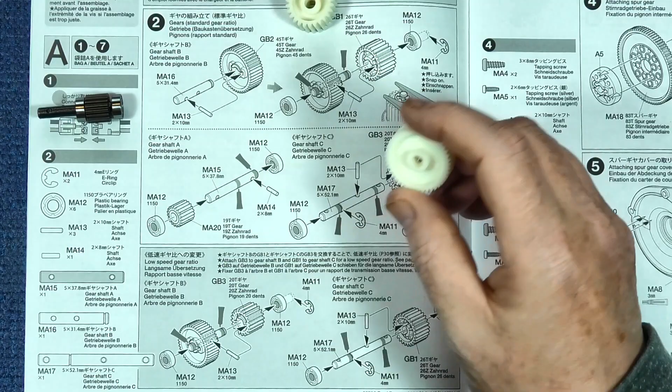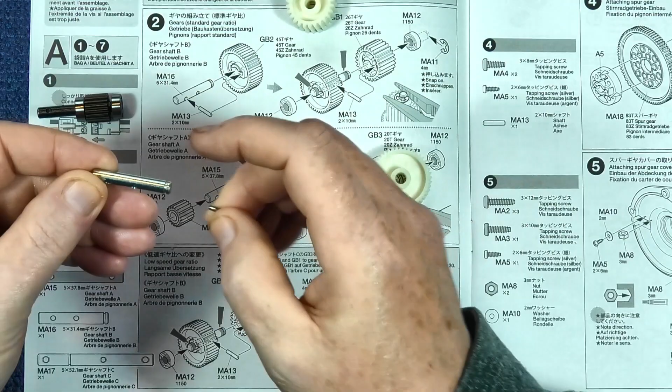First off, we get this part here, which is GB2, and it's 45 tooth, and then we need one of these steel pins. Checking the orientation of MA16 bar, we pop the rod through.

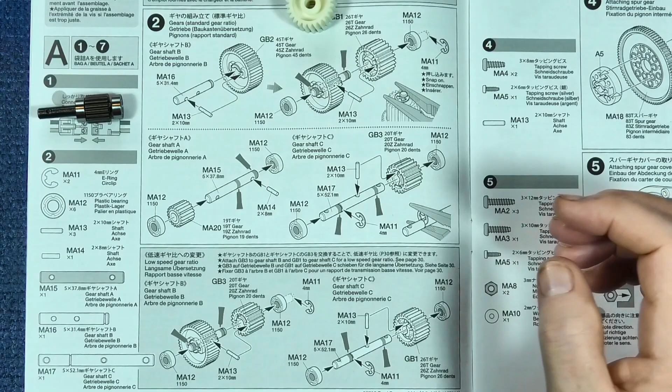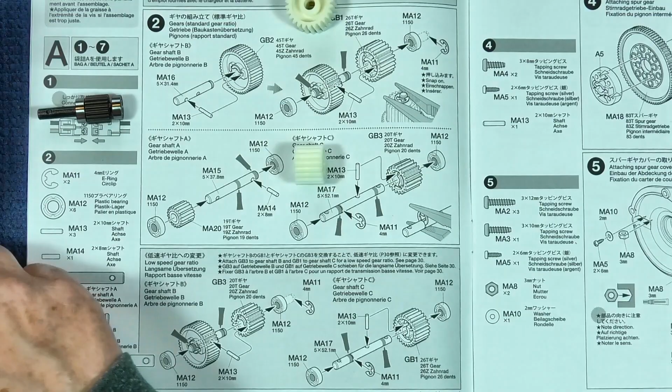And this is the tricky bit. We get the gear and pop it on, and as I say, because I'm going for the low speed, I'm going to take this part here, GB3, which is 20 tooth, and we're going to pop that one on instead of GB1, which is 26 tooth. So we pop that in there, and we pop that over as well, it says.

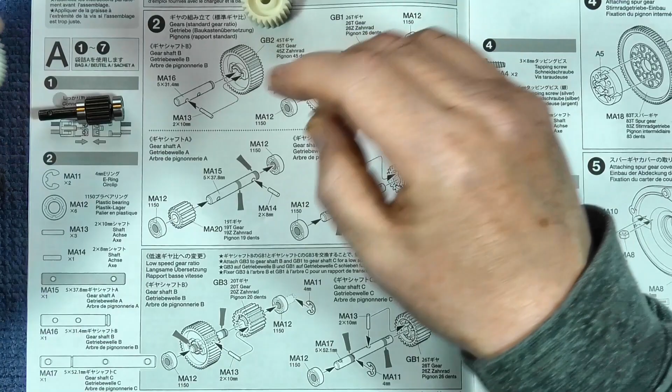And then, oops, we need an 1150 bearing, and in this case RC Junkies also supplied me with metal bearings, so I've chucked the plastic bushings away because I think I've got millions of them. And then we pop a circlip on. Almost. There we go. And that's your first gear sorted.

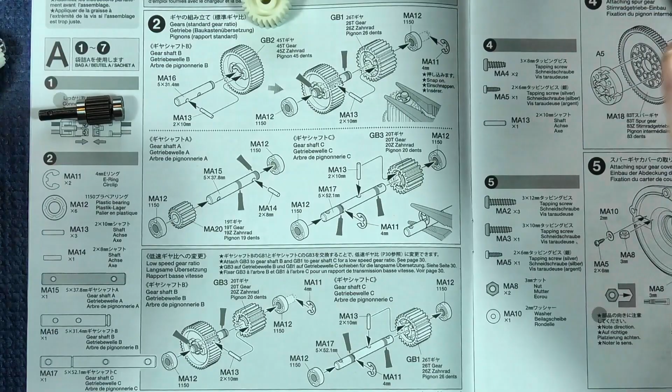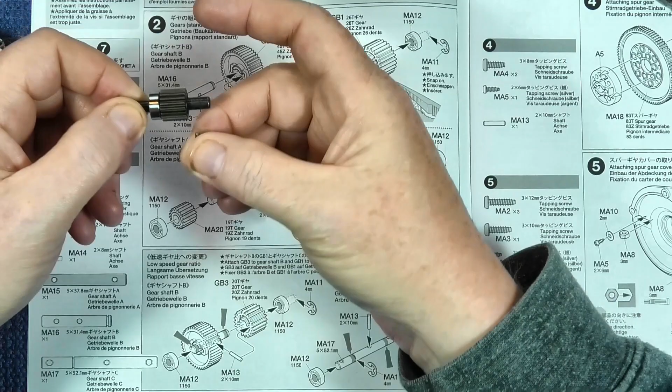I've done this, I think this is the A gear. I'll have to check. Yep, with that lovely metal gear, which is, I think, is it 19 tooth, do they say, or don't they say what tooth is? Oh no, it's another 19 tooth one. So I've done that one.

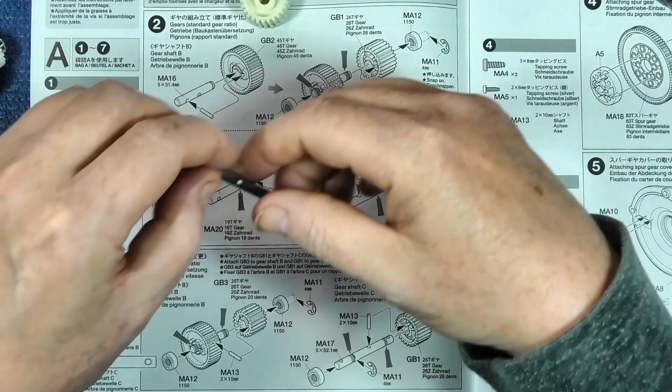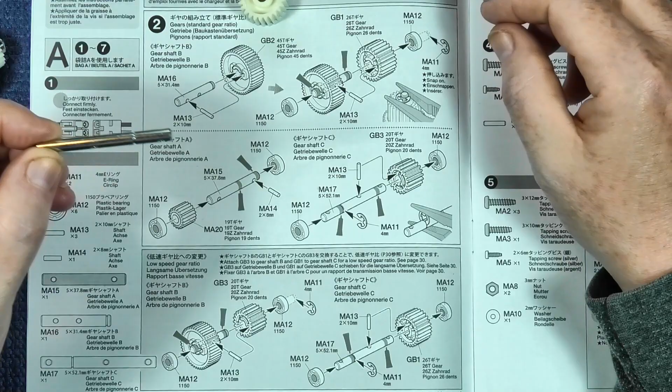I didn't realise it would fall apart when I picked it up, so we can leave that one, and we can then move on to which one is it, Gear shaft C. So we've got another circlip there, so I think we can put that on. Yeah, I can't see why we can't put that on now.

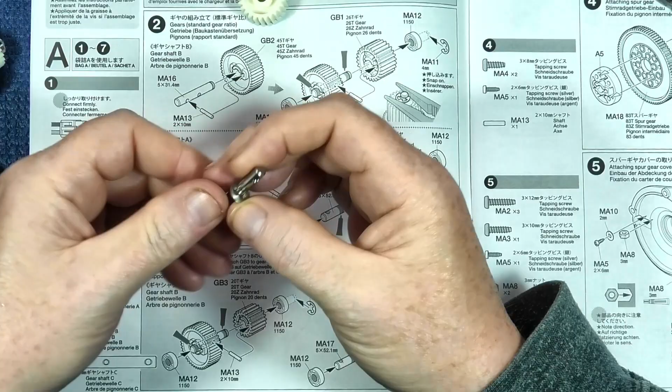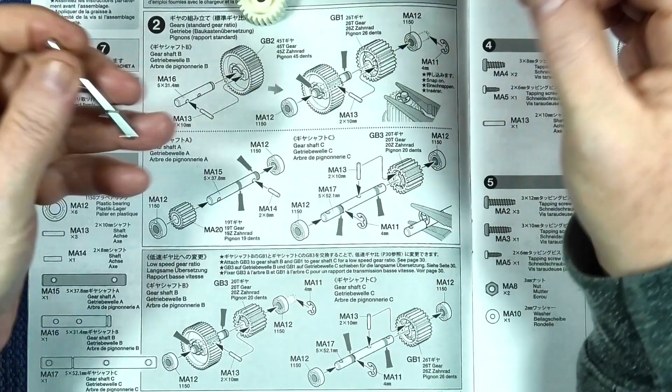Whoops. Hooray! Yep, so that's on. So then we need to orientate it, and we need another pin. And the gear, and then another 2 bearings, one on either side.

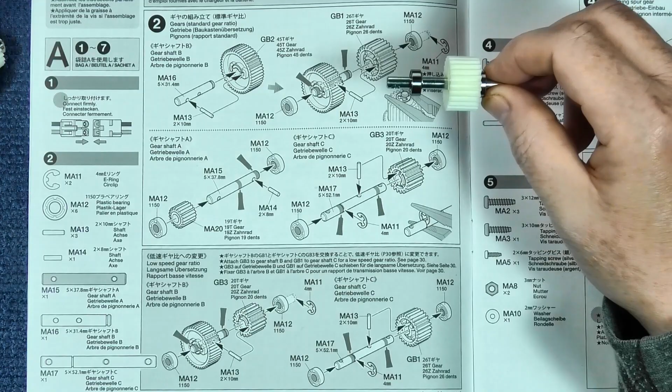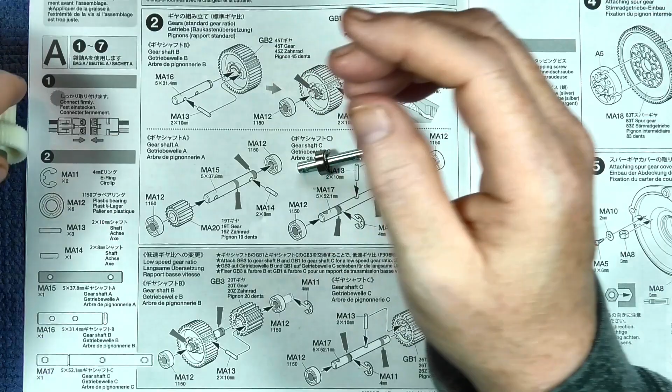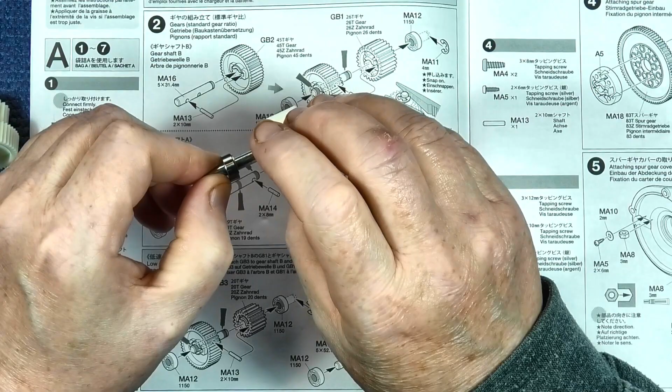And yeah, it falls apart again, and I forgot the bearing on this end for that gear, so there we go. That was all the gears made up till this one fell apart. I'll get the bits ready for step 3 and we can carry on.

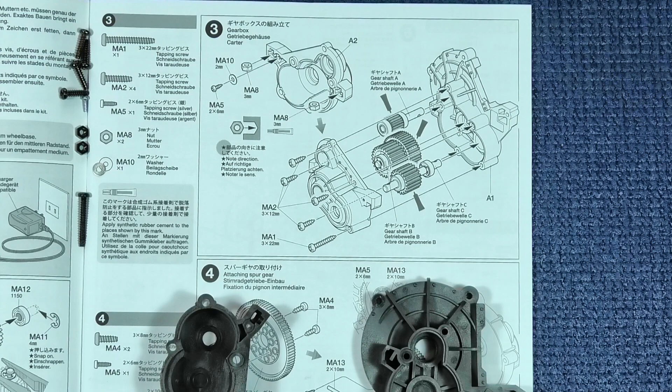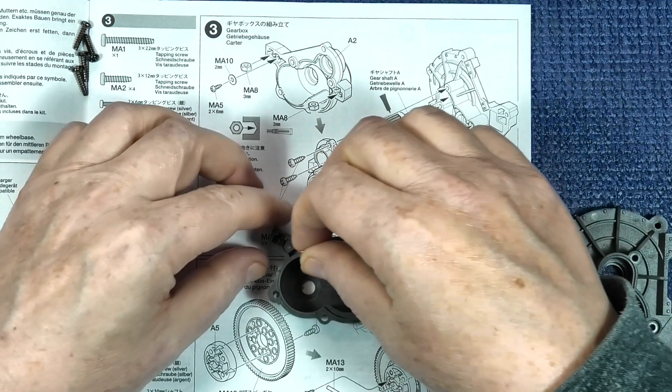Right, step 3 is installing the gears into the gearbox. So without further ado, we will get on with A2. And A2, we need to do a few bits, which is installing these 3mm nuts, and they're going like so, but this one needs to be held in place.

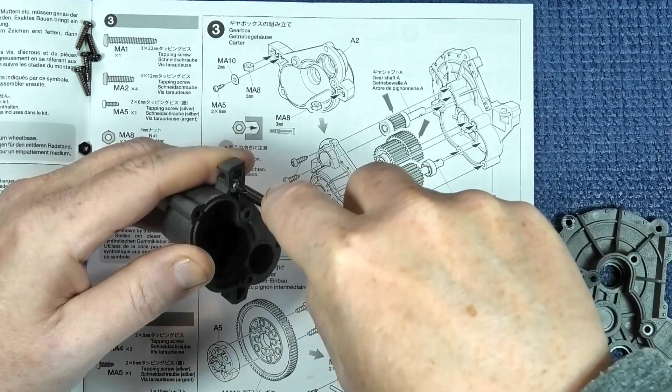By a 2x6mm screw and washer, which then goes in there. If I can get it in, and just, yep, that'll do. And then we can take a screwdriver. Doesn't look like it's going to hold it in place, but I shall see in a second. There we go, we'll tighten that up. So, well, yeah, it's a loose fit. The other one, however, just slots in there like that. So bear that in mind when we come to join them up.

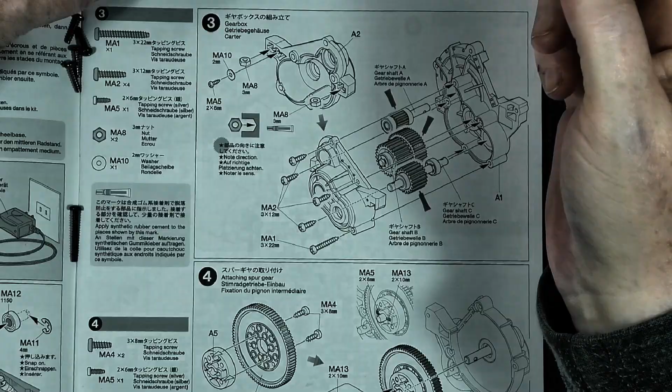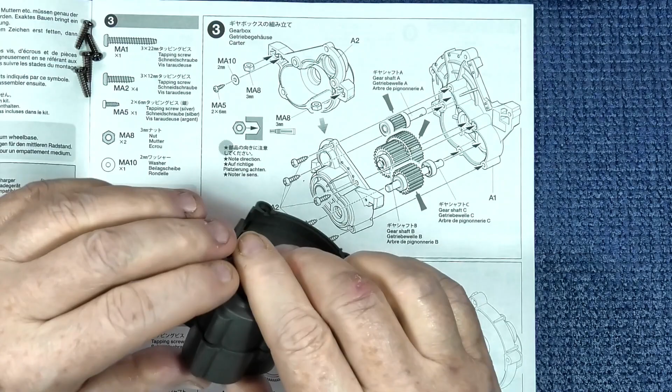Now, there's a note here that says apply synthetic rubber cement to the places shown on this mark. I wonder why that is. I would have thought that would have been held in place. Let me just check. Yeah. So, do you know what? I ain't got a clue what synthetic rubber cement is, so I'm not going to bother. We'll leave it loose and see how we get on.

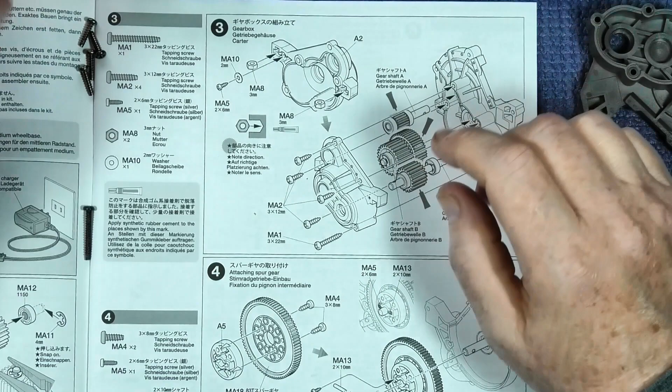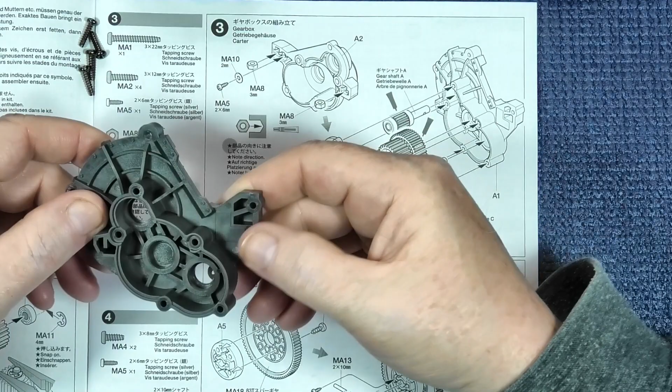Right, so the main bit, we take part A1, and this is like some sort of plastic alloy amalgamation. I'm not sure, I can't remember. It doesn't quite look like FRP, but it might just be the colour plastic they use to mix in with the fibres. But anyway,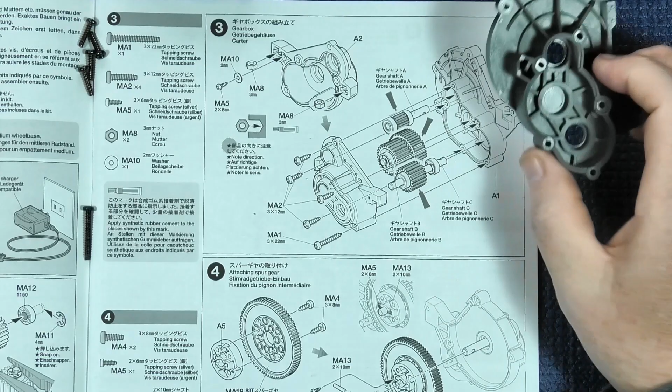We are going to need to do some greasing, I believe, and I think we start off by pushing that through there and then locating the bearing. And for applying grease, we've only got the one tub, but it's ceramic grease, so I'm going to use that. And what I tend to do is put a blob on, and then spread it round with a paintbrush like that.

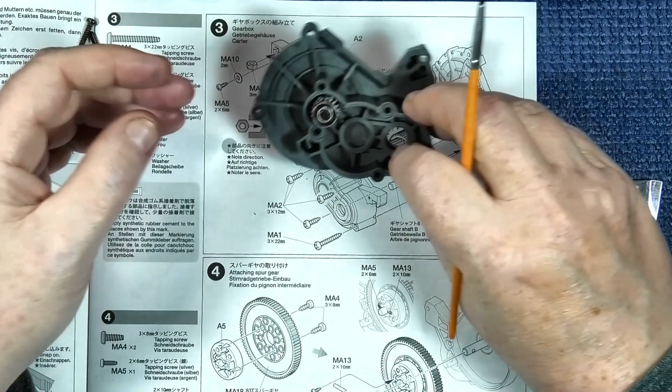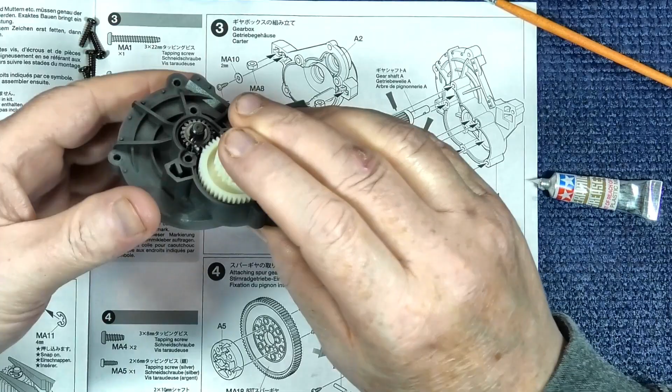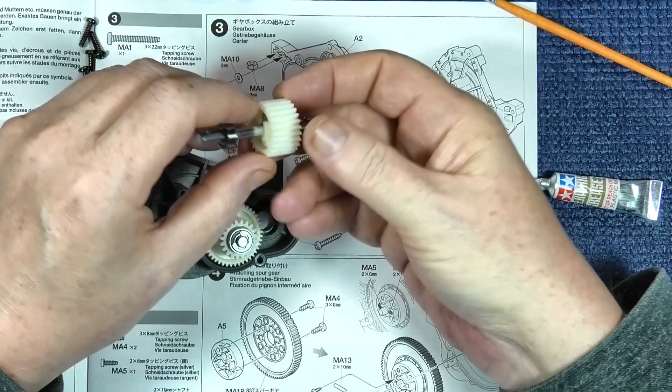And then, looking at the diagram, we've got this one that pops in there, and then finally this one, once I've put it back together, it looks like that's how it all goes together.

I'll get on and grease it all up, and then this just goes on like so, and that's why they want you to glue that in, because it fell out. But hey, I'll sort that out and show you the outcome shortly.

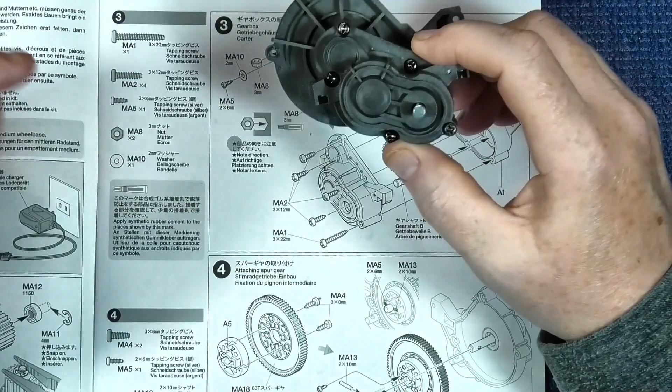Right, so here it is. It's held in with 4 12mm screws and 1 22mm self-tapper.

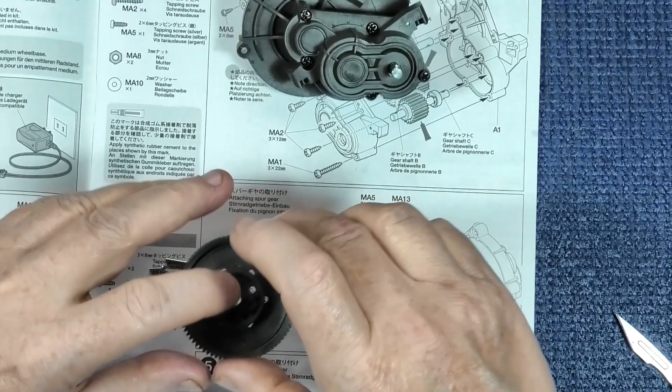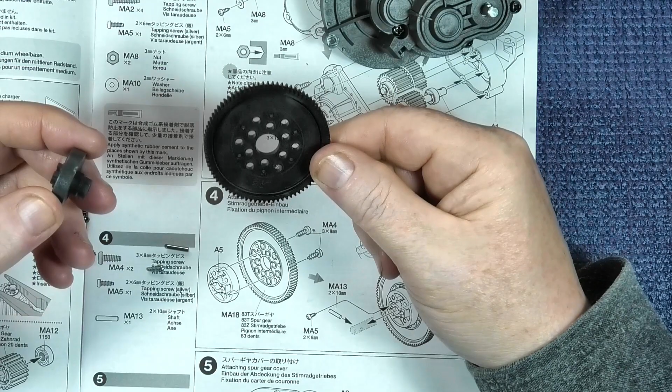Okay, so step 4 is making up the spur gear and then putting it into this gearbox here. So we've got parts A5 and the 83 tooth spur gear. Now that's a big spur gear if you ask me. I don't think I've ever seen one that big before.

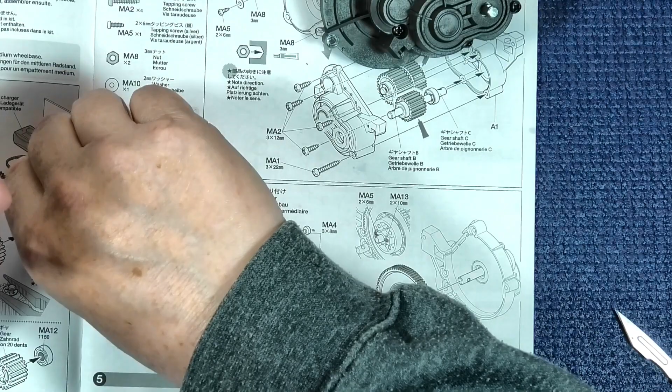And we pop A5 through, and then that's held together with just 2 screws, and it doesn't seem to matter where you screw them in as long as you do. That's like that. We then pass the spur gear through.

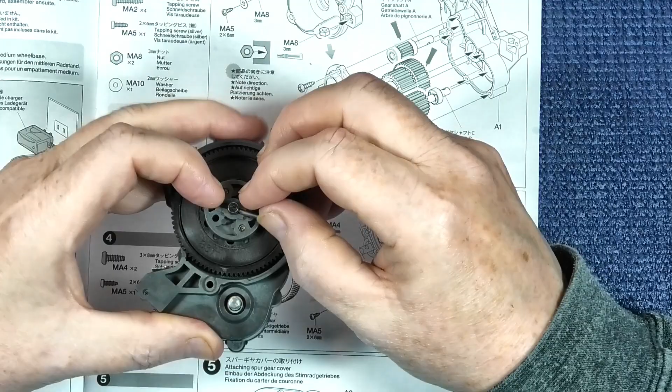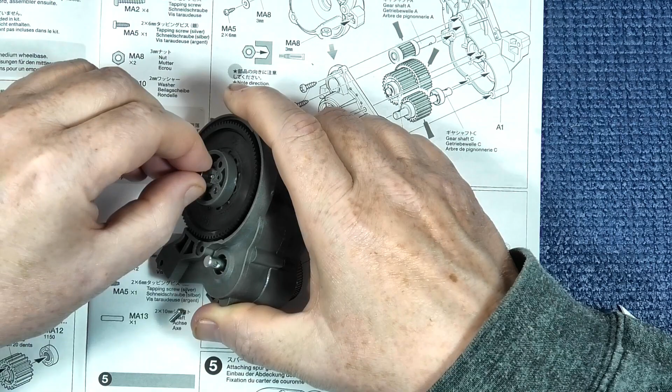And then we've got to try to line up the hole to put the 10mm bar through. Come on, you could do it. There we go. Surely, okay. Right. Okay, so what I've had to do is grab the shaft and pull it out so that the holes actually line up enough, and then we've got this screw here that goes in there.

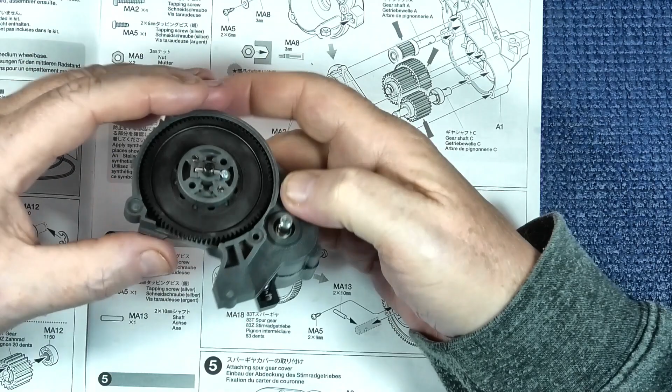Which once tightened will hold that pin in loosely. So I'll go round and grease that up, and we can carry on.

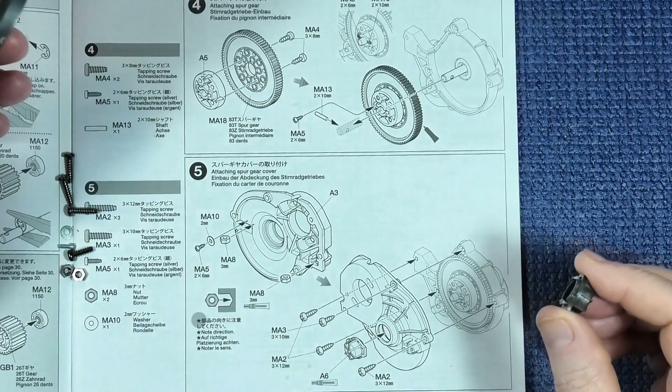Step 5 is installing the spur gear cover, which is part A3, but we also need this little part here, which is A6. That seems to tell you to glue this in, but there are clips for you to be able to take it out.

So I'm just going to try grease and see how I get on. And I think it should just push in, and yeah, it looks like it's going to hold in place. It's a bit loose, but hopefully that bit of grease that I put on will keep any dust out. Right, so coming back then, we've got

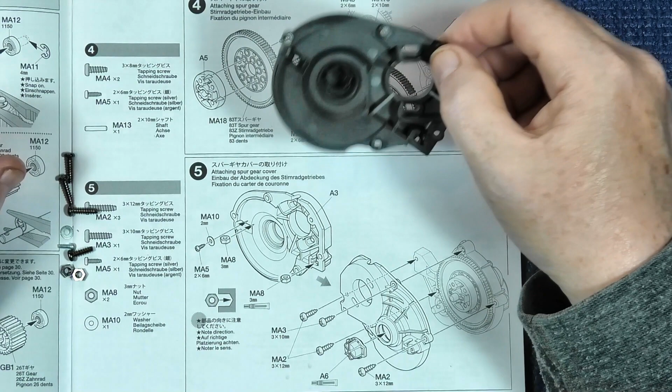Orientation this way round. Yes. Right, now this is going to be tricky for my podgy fingers. We've got to install one of these nuts in there. There we go, I think it's in.

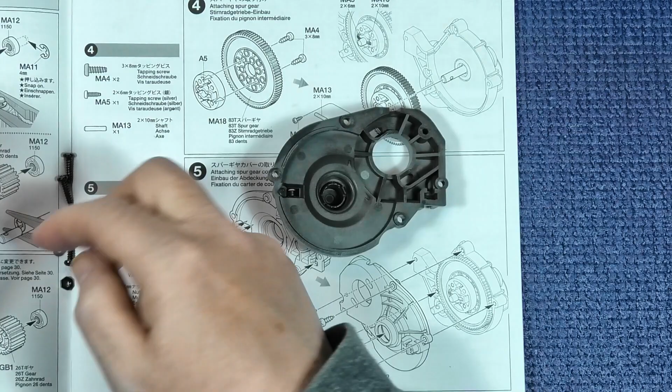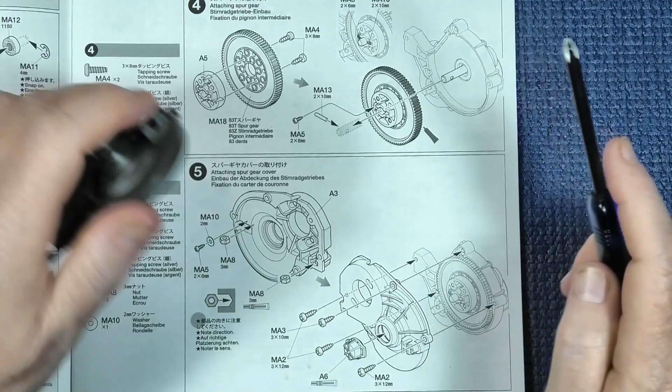But then that one we've got to hold in place with a 2mm screw and washer, like that. Yeah, and it's not coming out.

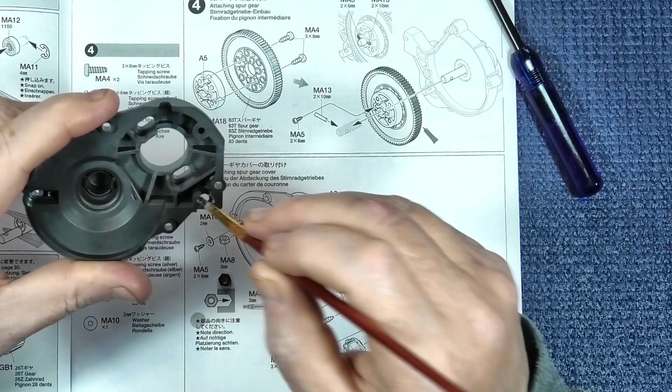But again, the other side is telling me to glue it in. So we are going to put some of this sticky grease in and pop it in and see how we get on.

And then before I join them up, I'm going to go around with the same grease, just hopefully to help seal it. There we go, and then we need to bring

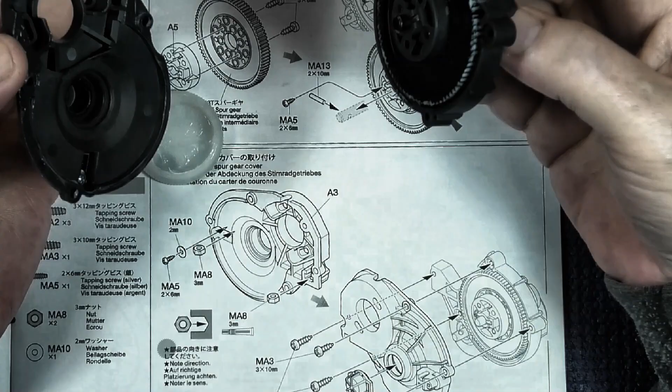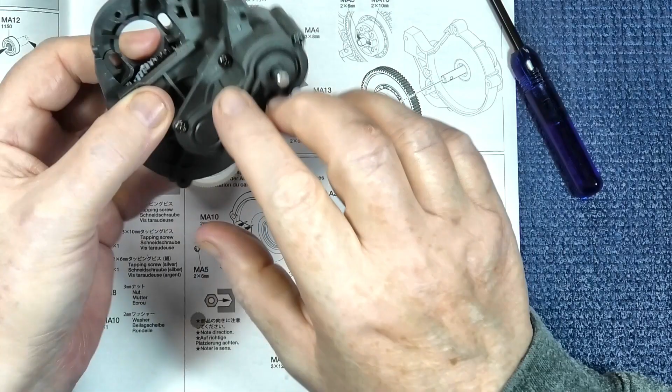This in and join them together somehow. Something along those lines, I think. It goes, slots in there, that's it.

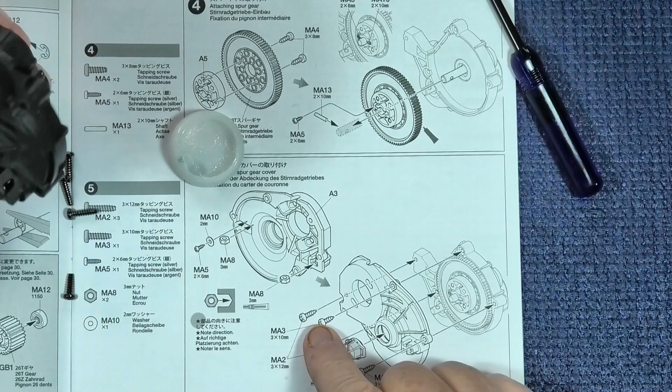Yep, I think that's how it goes. And then that one there. Right, I don't know why, but this first screw is an MA3, which is 10mm. So that can go in there, and the other 3 are 12mm for some reason.

So it's one there, I'm assuming one there, yeah, and the last one there. So I'll finish that off and we can turn the page.

The last 2 steps for this episode, 6 and 7, are installing the pinion gear in the motor and then installing the motor into the gearbox. So we'll start off with installing the pinion gear.

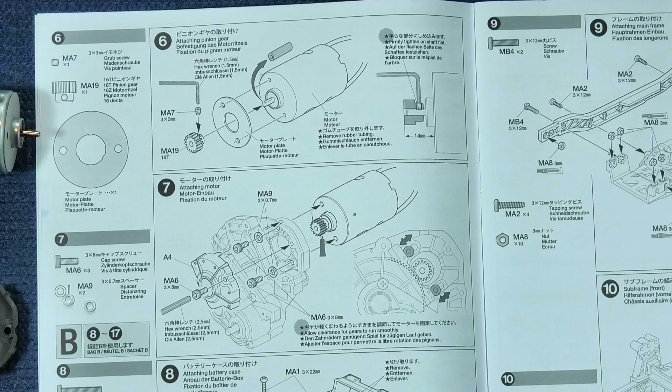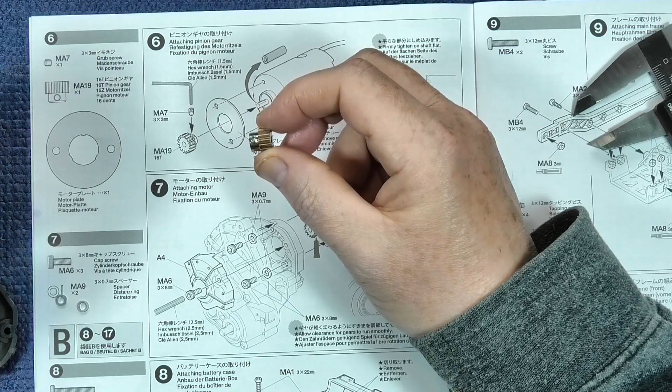Okay, so you're supplied with a 16 tooth pinion gear and a 3x3mm grub screw, as well as the motor plates, which I've already put in and lined up. So there's a flat on the motor output shaft that you line up with your grub screw, and then on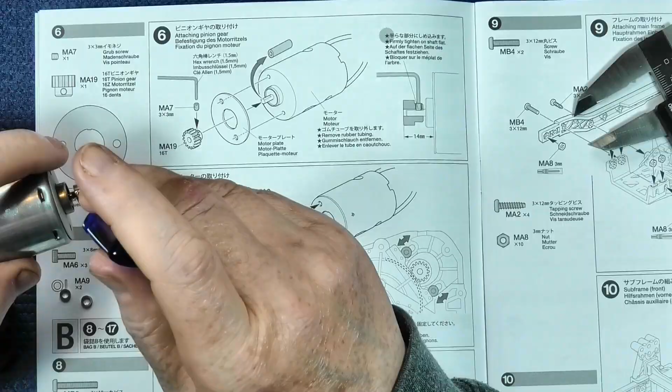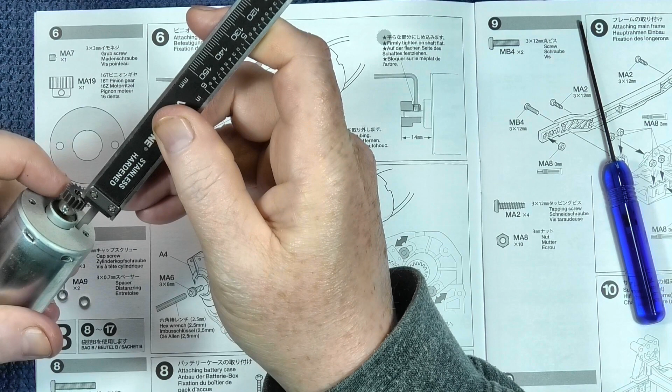The right hand side here it's telling you 14mm. So that's pretty close to me, so we'll tighten it up a bit more because I've just moved there. See what that's like.

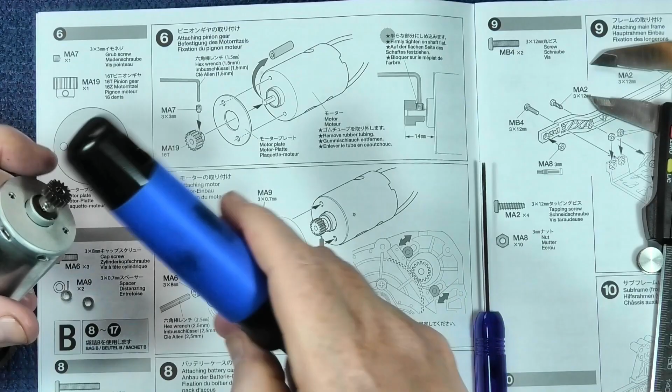Yeah, maybe tap it in a bit if I can. And yeah, that should do. So I'm going to tighten it up, and that's that bit.

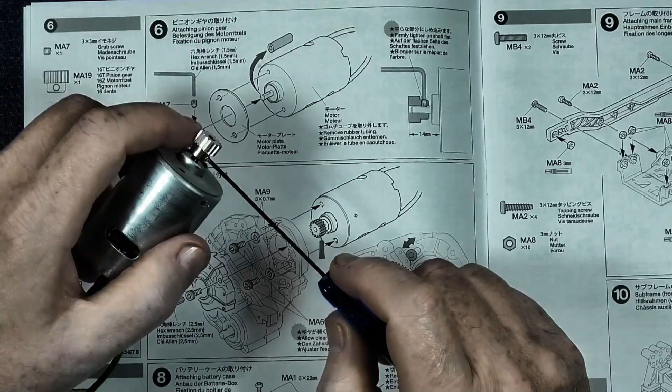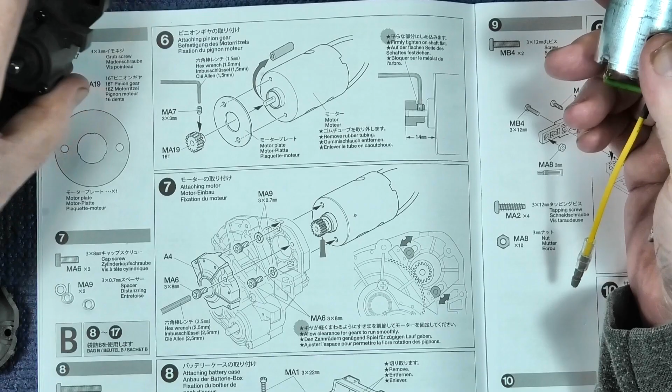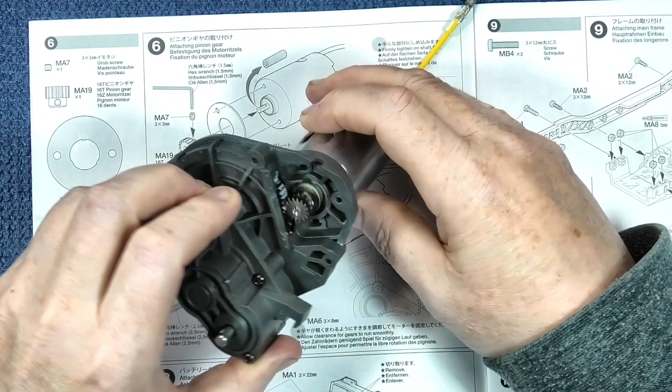And then moving swiftly on to step 7, we need to install the motor itself, and it goes in like so. And another fiddly job, because we've got hex screws for this one for some strange reason.

And for the motor mount itself, we've got these 2 washers, which I have no idea why they're on there, because they're not even as wide as the head of the screw. Oh well. Another Tamiya mystery.

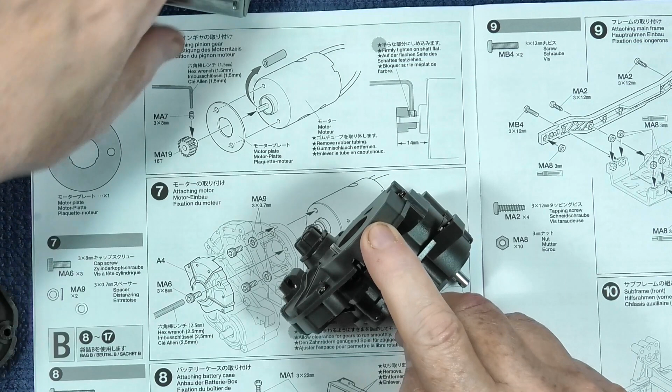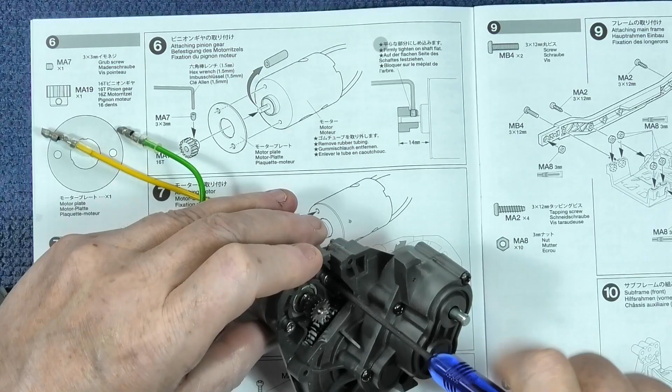So pop the thing through, line the screw hole up if you can. And allow clearance, it says. So, where's a bit of paper? Okay, so I've got a bit of paper because I use this to get my gaps,

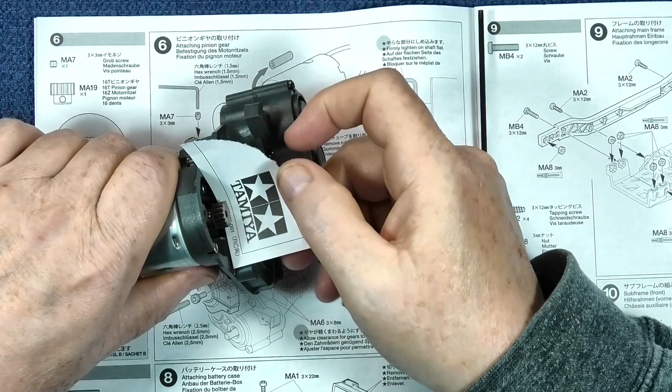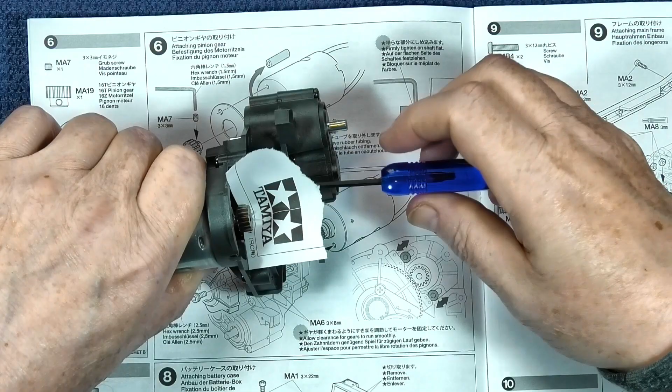And can't move it because I've tightened something up a bit too tight. There we go. So I then push down quite firmly, tighten one up, tighten 2 up, and then give it a yank.

I think I might have done that a bit too tight. Oh dear. Right, well, we'll see how we go with that. So there we have one gearbox and motor

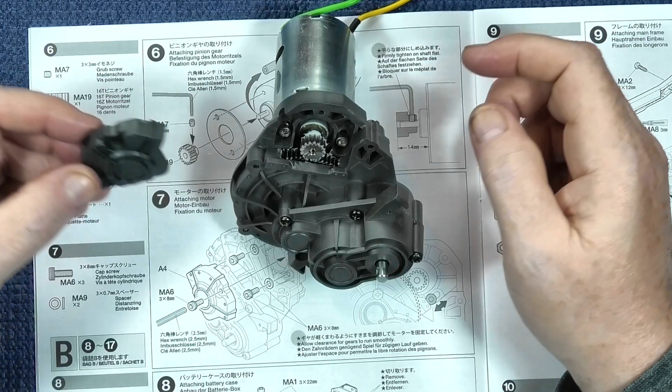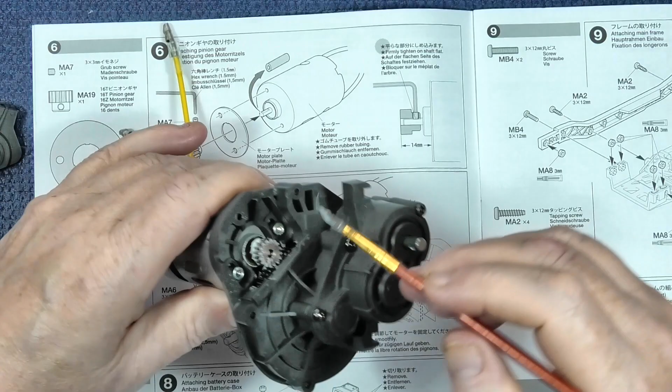Almost installed. I forgot I've got this one bit left that goes on there, so we'll quickly grab my paintbrush and sticky stuff, and we'll go around this joint here, and it goes on like that and is held in with another one of these hex screws for some reason.

And there we have one completed gearbox. So with that, I'm going to leave it here because it's the end of parts bag A. I hope you've enjoyed watching and look forward to seeing you on the next one. Cheers, bye!